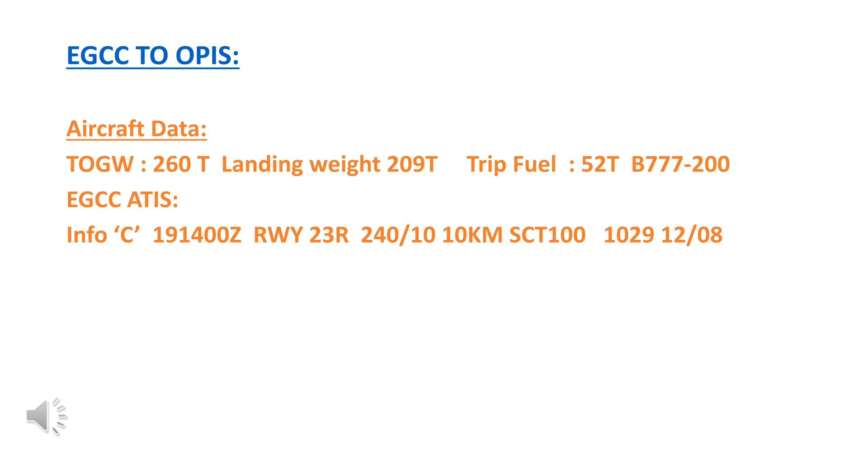Echo Golf Charlie Charlie, page 10-1 Papa 6, departure information. When lining up for takeoff from runway 05 left or 23 right, full length of the runway surface may not be visible from the flight deck. Runway 23 right, length is 10,000 feet, width 148 feet, stopway nil, airport elevation 257 feet, NOTAM no significant.

Number 1. VMCG is defined as the minimum speed whilst on the ground at which directional control can be maintained using only aerodynamic controls, with one engine inoperative and takeoff power applied on the other engine.

Number 2. VMCG must be less than V1. Number 3. Abort is a standard maneuver which is occasionally exercised by the flight crew when required. Number 4. There are certain duties and actions which are performed by the captain and calls by the co-pilot. Number 5. As the weather deteriorates, aircraft serviceable items on MEL are also increased.

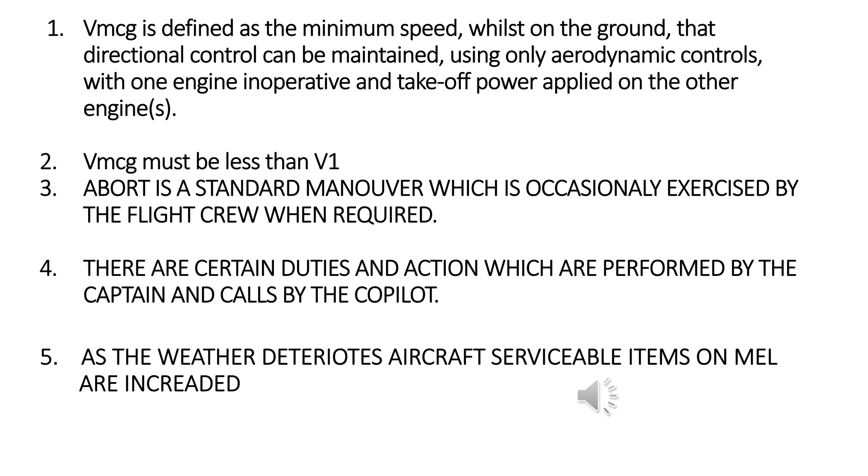Thrust Asymmetry Compensation System, TAC, has to be serviceable whenever visibility or RVR is less than 400 meters. If taking off from a contaminated runway, V1 is reduced to keep the field balanced. Balanced field length for a given takeoff weight is defined as the distance required to accelerate to V1 and safely stop the aircraft on the runway.

When visibility or RVR is less than 150 meters, crosswind component is limited to 15 knots. Takeoff alternate for the Boeing 777 is one hour time on single engine TAS. With very limited visibility, directional control with reference to the center line is difficult, particularly when there's inherent swing of an engine and loss of streaming effect.

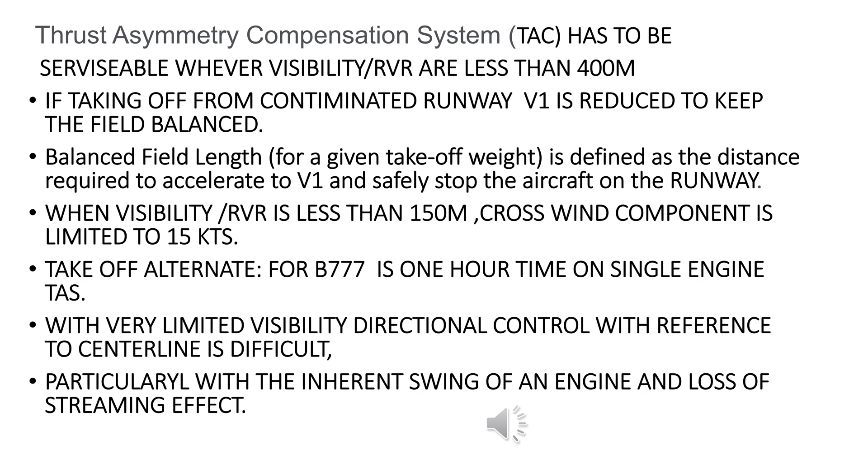Number 1. If the engine failure occurs above the TAC activation speed, to maintain directional control, TAC rudder input is available during forward thrust until speed is reduced below TAC activation speed. Number 2. With TAC inoperative, the pilot flying must make rudder inputs and differential braking. Number 3. V1 means the maximum speed in takeoff at which the pilot must take the first action - apply brakes, reduce thrust, deploy speed brakes - to stop the aeroplane within the accelerate-stop distance.

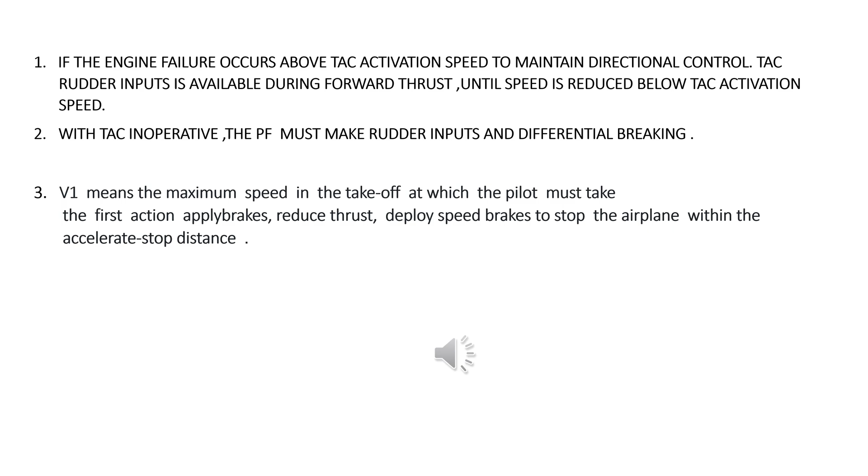Conditions of heavy weight abort. Number 1, fire or fire warning. Number 2, engine failure. Number 3, predictive wind shear warning, that is wind shear ahead warning.

Number 4. If aircraft is unable or unsafe to fly, the decision to abort the takeoff is the responsibility of the captain. For executing prompt abort action, the captain will keep his hand on the thrust lever until V1, regardless of whether he is pilot flying or pilot monitoring. The first officer will announce precisely any malfunction or serious situation during takeoff.

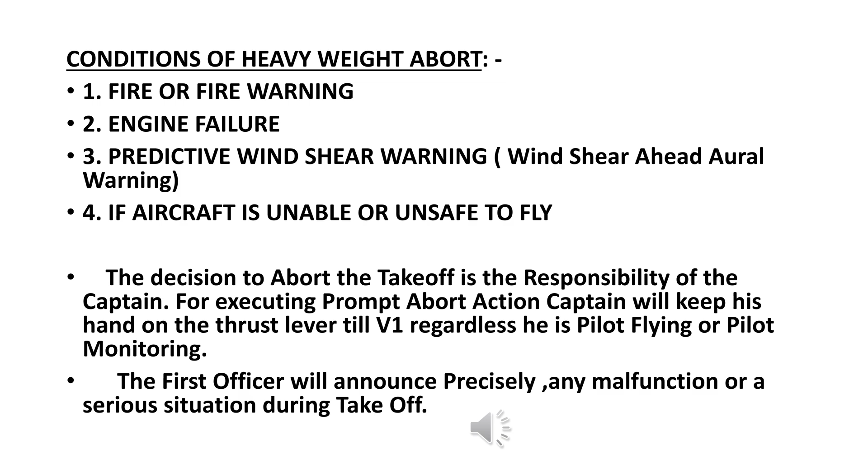Captain's task: non-normal maneuvers in QRH. Without delay, simultaneously close thrust levers, disconnect auto throttles, and apply maximum manual wheel brakes, or verify operation of RTO auto brakes. If RTO auto brakes is selected, monitor system performance and apply manual wheel brakes if the auto brake message is displayed or deceleration is not adequate.

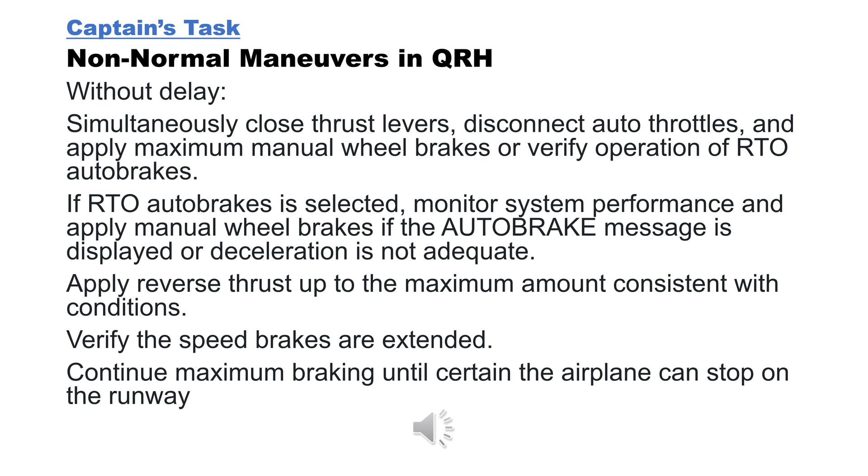Apply reverse thrust up to the maximum amount consistent with conditions. Verify the speed brakes are extended. Continue maximum braking until certain the aircraft can stop on the runway. When stopping is assured, start movement of reverse to idle detent before taxi speed.

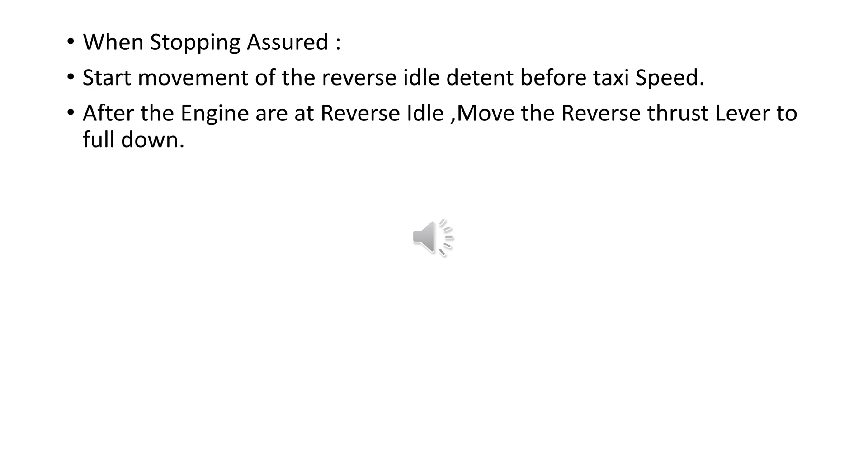After the engines are at reverse idle, move the reverse thrust lever to full down. First officer duties: verify action as follows - thrust levers closed, auto throttle disconnected, maximum brakes applied, reverse thrust applied.

Verify speed brake lever up and call speed brakes up. If speed brake lever is not up, call speed brakes not up. When both reverser indications are green, call reversers normal. If there are no reverser indications or the indication stays amber, call no reverser left engine, no reverser right engine, or no reversers. Call out any omitted action items.

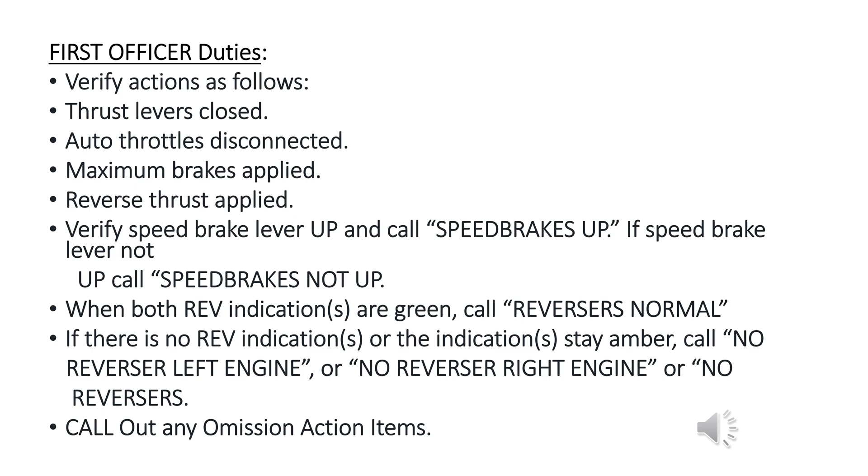Call out 60 knots. Communicate the rejected takeoff decision to the control tower and cabin crew as soon as practical.

After abort, captain's task after the aircraft comes to a complete stop: set parking brakes, announce on PA system 'attention cabin crew at stations,' perform procedures as needed. After a rejected takeoff, the captain reviews the brake cooling schedule for brake cooling time and precautions in the performance in-flight QRH chapter.

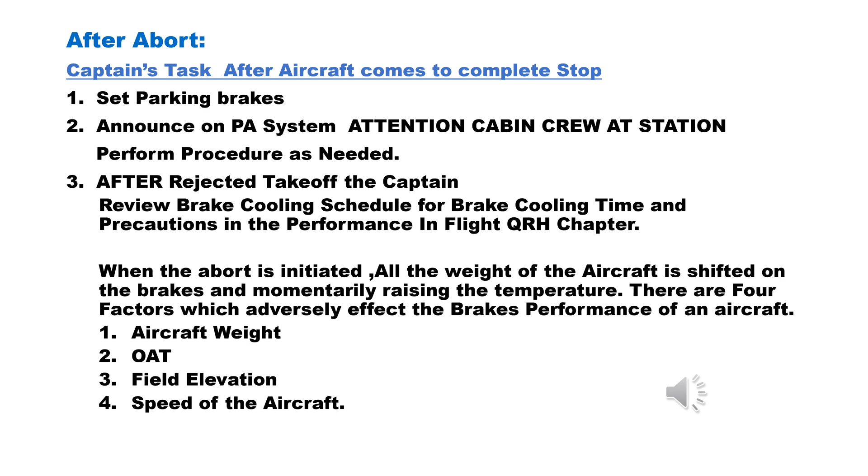When the abort is initiated, all the weight of the aircraft is shifted onto the brakes, momentarily raising the temperature. There are four factors which adversely affect the brake performance of an aircraft. Number 1, aircraft weight. Number 2, outside air temperature. Number 3, field elevation. Number 4, speed of the aircraft.

Consider the following: Number 1, the possibility of the wheel fuse plug melting. Number 2, the need to clear the runway. Number 3, the requirement for remote parking. Number 4, wind direction in case of fire.

Number 5, alerting fire equipment. Number 6, not setting the parking brakes unless passenger evacuation is needed. Number 7, advising the ground crew to approach the aircraft with caution. Number 8, advising passengers of the need to remain seated or evacuate. Number 9, completion of non-normal checklist if applicable for conditions which caused the RTO.

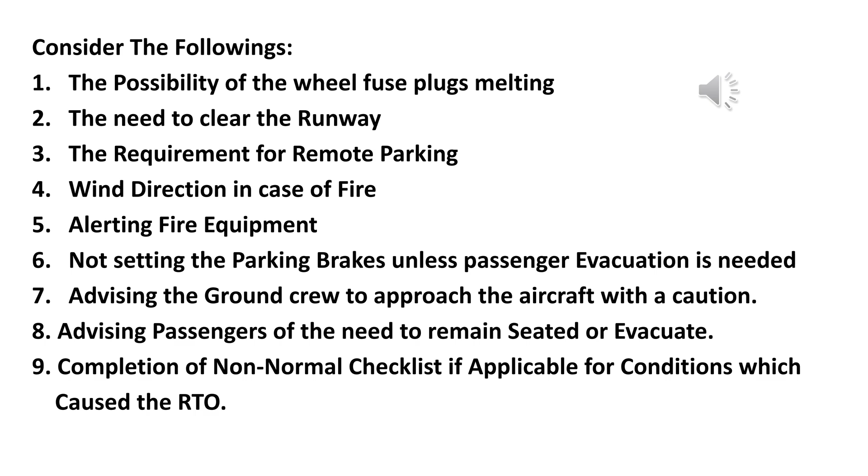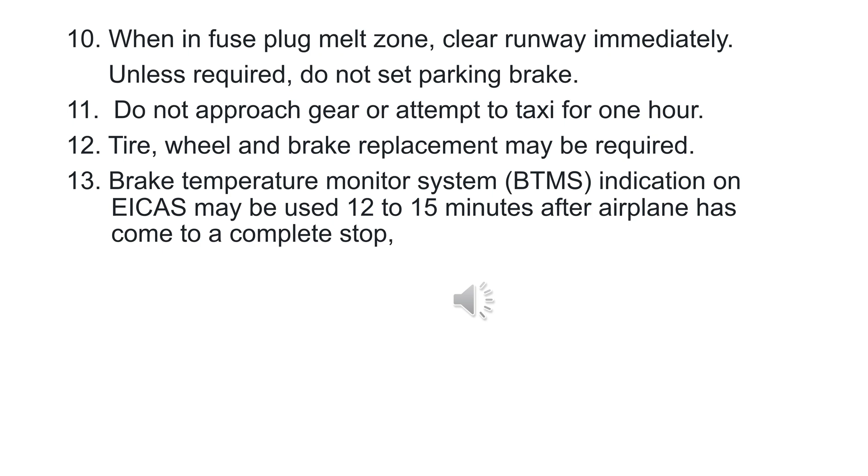Number 10, when in the fuse plug melt zone, clear the runway immediately, and unless required, do not set the parking brake. Number 11, do not approach the gear or attempt to taxi for 1 hour. Number 12, tire, wheel and brake replacement may be required. Number 13, brake temperature monitor system, BTMS, indications on the EICAS may be used 12 to 15 minutes after the aeroplane has come to a complete stop.